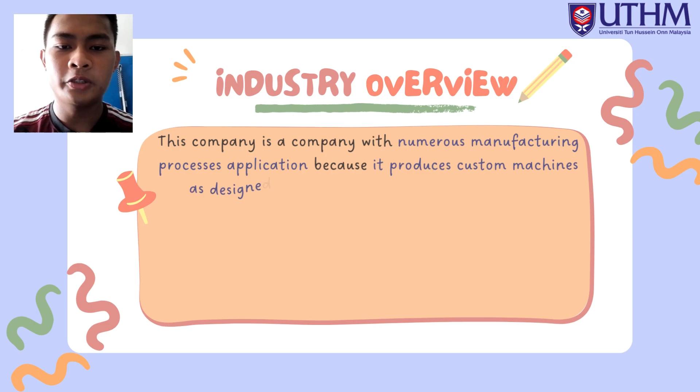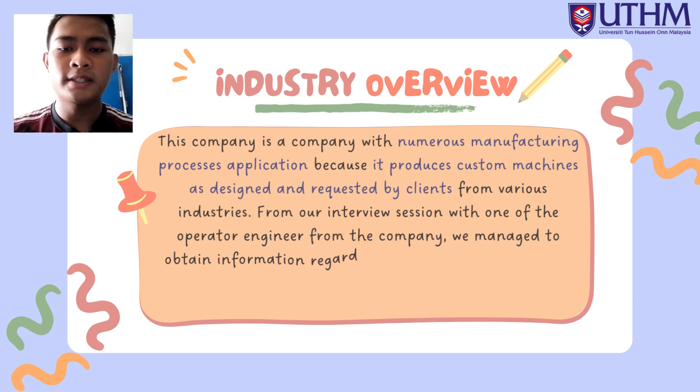This company has numerous manufacturing process applications because it produces custom machines as designed and requested by clients from various industries. From our interview session with one of the operator engineers from the company, we managed to obtain information regarding the working system of the company, its precautions, practices, and some tips to excel when working in the same industry.

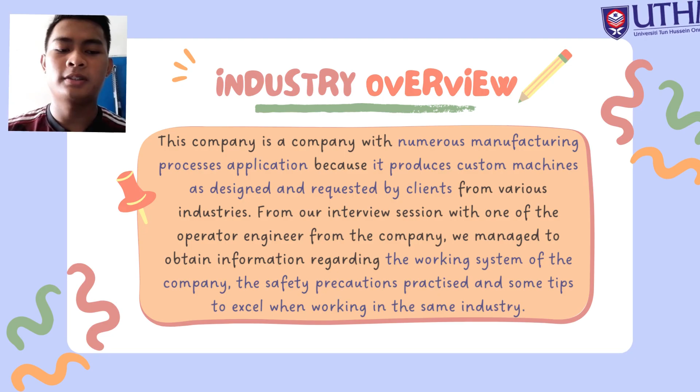Let's go through our objectives for this group assignment. Firstly, regarding the company's business, to gain knowledge about different manufacturing machines produced by various companies, it is necessary to conduct an identification process. Then, for the working system, to have the ability to conduct research and recognize operational protocols within the organization. For the work environment, to gain knowledge about the environment while working in a machine manufacturing company and its various aspects. Last but not least, tips and advice when working in that particular industry, which will be useful exposure for students in future industrial training.

Since the interview session was conducted online and the internet connection was unstable periodically, we had a request from the interviewee not to ask too many questions. So we were able to gain a handful of useful information, and we needed to complete our research by investigating additional information throughout the internet.

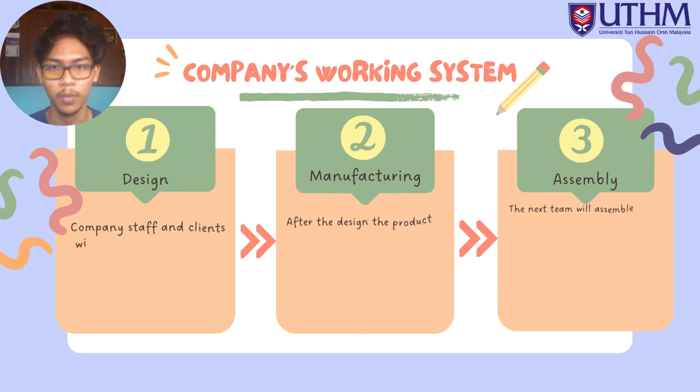Assalamualaikum and hi, my name is Muhammad Hafiz. I will continue about the company's working system. There are three stages of a working system.

The first stage is design. Company staff and client will suggest some drawing designs for the machine. They will analyze and choose the design to have suitable size and operation.

Next stage is manufacturing. After the design, the production staff will discuss with each other to use some manufacturing methods, such as joining process, moulding, casting, milling, and other methods to create the machine effectively.

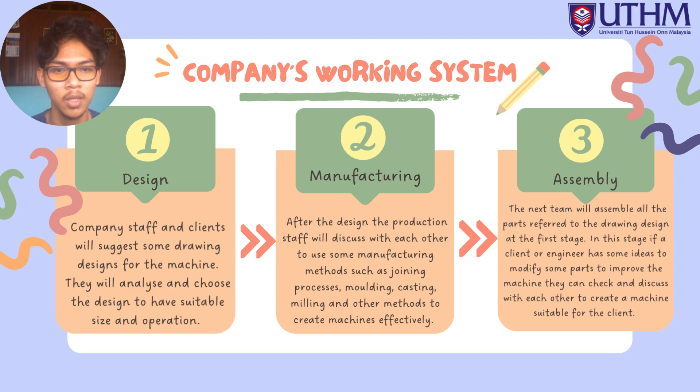The last stage is assembly. The team will assemble all the parts referring to the drawing design from the first stage. In this stage, if a client or engineer has some idea to modify a part to improve the machine, they can check and discuss with each other to create a machine suitable for the client.

From activities, now I will talk about the operation of the manufacturing process. First, we have design and planning. The engineers and designers will create detailed plans and specifications for the product.

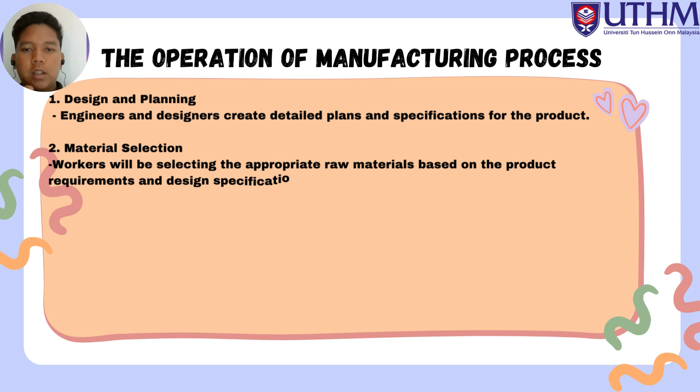Number two, material selection. Workers will select the appropriate raw materials based on the product requirements and design specifications outlined by clients.

Number three, material preparation. Raw materials are prepared for the manufacturing process through cutting, shaping, or other processes to make them suitable for the next step.

Number four, machining. Machining processes such as milling, turning, drilling, and grinding are used to shape and refine the materials into the desired components.

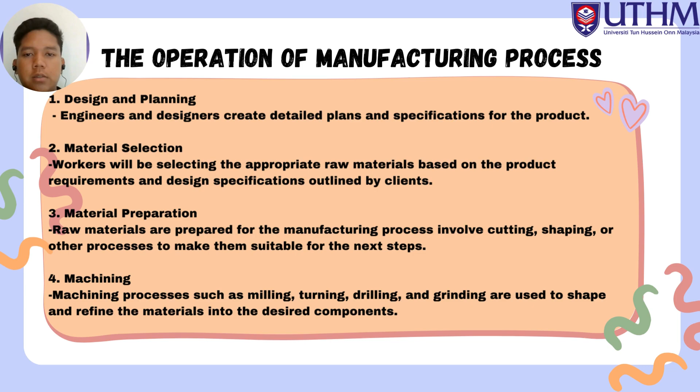Number five, assembly. Components are assembled to create the final product. This can involve manual labor or automated assembly lines.

Number six, quality control. Inspection and testing are crucial steps to ensure that the manufactured products meet the required standards and specifications. Number seven, finishing. Surface finishing processes such as painting, coating, or polishing are applied to enhance the aesthetics and functionality of the product.

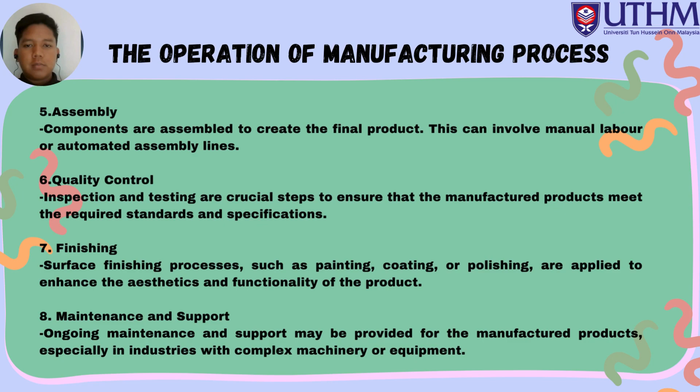Number eight, maintenance and support. Ongoing maintenance and support may be provided for the manufactured products, especially in industries with complex machinery or equipment. Automation: many modern manufacturing processes incorporate automation to increase efficiency and reduce human intervention. And lastly, continuous improvement: manufacturers often engage in continuous improvement processes to enhance efficiency, reduce costs, and improve quality of their products.

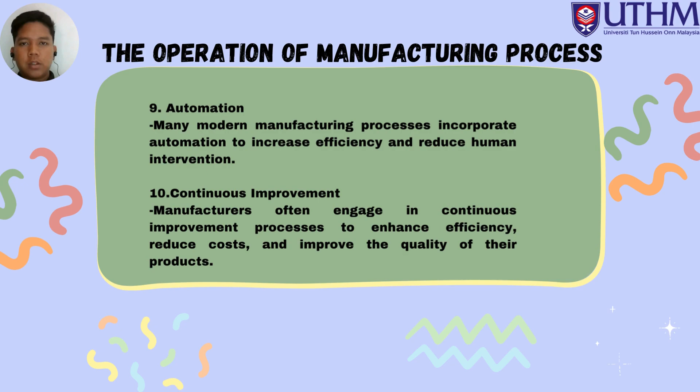Now I will talk about expertise required. First, industry expertise: in-depth specialized knowledge of the industry acquired through experience, education, and a keen awareness of sector dynamics, trends, and issues. Number two, financial expertise: a thorough grasp of financial concepts, principles, and practices, covering personal finance, investment, corporate finance, financial markets, and economic variables. Number three, strategic expertise: high-level knowledge, skills, and experience in developing and implementing strategic plans for organizations or individuals.

And lastly, number four, lifelong learning and development. This emphasizes that expertise is a continuous, lifelong process requiring perseverance, a passion for perfection, and a readiness to adapt.

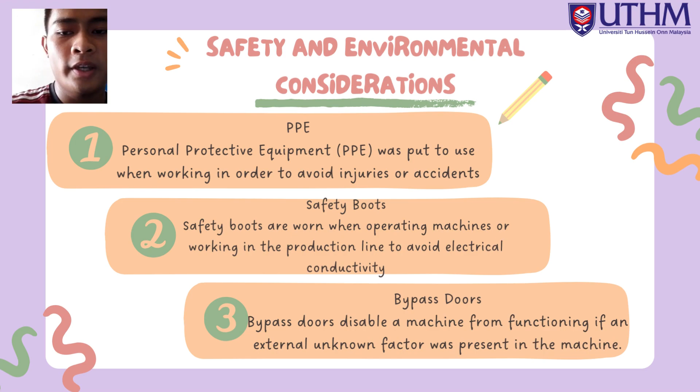Okay, for the safety and environmental considerations, first we use PPE, which is personal protective equipment. It is put to use when working in order to avoid injuries or accidents. Next is safety boots. Safety boots are worn when operating machines or working in the production line to avoid electrical conductivity. So the last one is bypass doors. Bypass doors disable a machine from functioning if an external unknown factor is present in the machine.

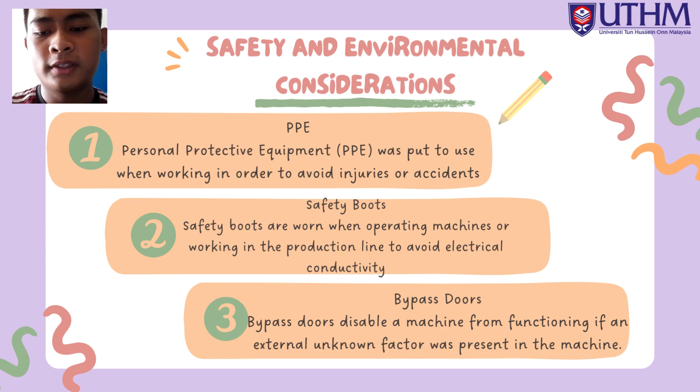The company's name is Pentamaster Corporation Berhad, headquartered in Penang, Malaysia. They produce custom machines with specified functions and design as requested by their clients. The name of the interviewee is Mr. Amirul Ashraf, and he is the operating engineer of the company who works in the production line.

As shared by Mr. Amirul, practical schedule management is how the company oversees the efficiency of their production line. To ensure safety and comfortability of the work environment, workers are always reminded to put on their safety equipment before starting their operation. After each product is complete, the quality assurance team will inspect the product to check if it met the expected quality and customer requirements, is safe to use, and is practical in the client's industry.

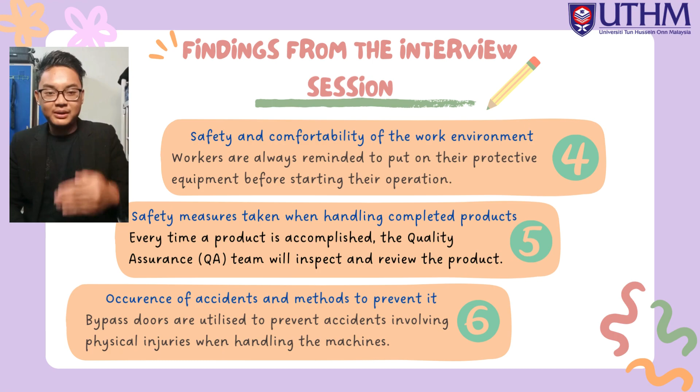An accident once happened in the company regarding an exposed machine. Since then, the use of bypass doors has been enforced to ensure the same accident will never happen again.

Some preparations worth making before joining this type of industry is to excel in mechanical and electrical engineering to ensure proper understanding of the work and enable oneself to build machines accurately and successfully. Other than that, acing AutoCAD can also ease the job, since the initial step of developing products is by understanding the drawings and concept designs prepared by clients.

2 to 3 years of working experience is estimated to be sufficient in order for a person to get fully familiar with the job.

One of Mr. Amirul's most unforgettable experiences when working with the company is when they were setting up a machine in China and got to experience their working environment and learn a lot of new things.

Finally, moving on to the last part of the question are the tips shared by Mr. Amirul for people who want to join this industry. First, they need to have a deep interest in machines and technicals to avoid boredom. Next, patience is crucial since working can be tiring and facing various people with various attitudes every day can be quite challenging. Last but not least, curiosity should be encouraged to motivate workers to learn and explore new things every day, which will significantly improve our mood when working and lead to increased performance.